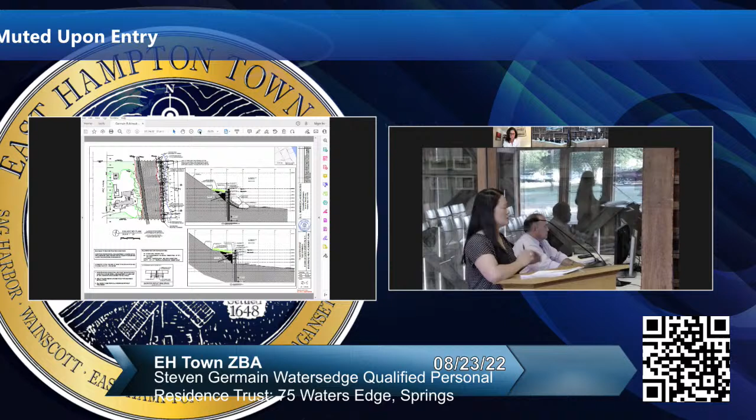No, most of them are okay. Once the shore guard is put in behind, depending upon where it sets, some of the stones have shifted a little bit, so they'll just be lifted and reset right in place, so that you can replace the bulkhead.

Yes. Now, on the tie rods, are they helicals or are they tie rods to dead men? They were converted to helical piles. They were originally proposed to do dead men, but we discussed it with the engineer, and the helical piles, they feel, are sufficient to stabilize it while minimizing the disturbance area.

So we will have a little tiny bit of disturbance just on the back side, and that area will be replanted with beach grass. But we felt that the helical piles will give the same kind of stability for anchoring it while not having to over-excavate and place new dead men.

And the equipment for the helical piles will be brought how? Through the barge? Correct. It'll all be done from the water. There is no land access.

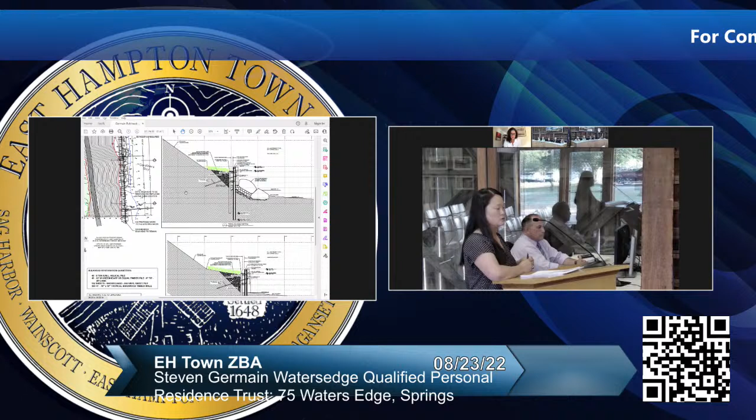There's no bluff walkway down to this property. It's about two properties away through an HOA property that you can gain access to the site. Otherwise, everything will be brought in by barge, and all the work will be done via the barge as well.

So the boulders that are there now will be moved out of the way for the repair of the bulkheads, then put back in place where they sit now? Most of the boulders can actually stay where they are.

They'll pull the existing damaged bulkhead out, and then they'll just drive in the new bulkheads. And then if any of the rocks have shifted in that process, they'll reset those. There are a couple rocks that have shifted as well, so they'll reset those in the same process. They'll do about 30 feet at a time.

And there's still no proposed work to the existing groins. Correct. They're going to remain as they are.

And then the revegetation of the bluff afterwards, you want to speak to that? It'll be minimal because we are no longer over-excavating in order to place the dead man. But there will be beach grass placed on the landward edge, which is already growing there right now. And it is a substantial bluff there with vegetation. Oh, absolutely, very, very well screened.

Anybody have any questions? If these change to helicals, it's going to change slightly what you're doing in order to achieve your goals. Will there be a drawing that's going to reflect that we'll have less planting, potentially? You're just going to complete the planting or whatever's necessary when this project is done behind the bulkhead, is that right? Correct. And there was a drawing submitted that shows the helical pilings.

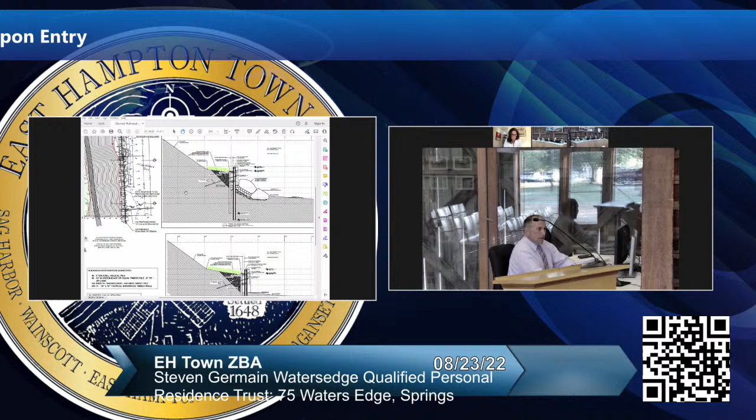The only thing that's a little bit different here is that at the northernmost of about 1,400 linear feet of properties, they either have stone armor with a bulkhead or just stone armor and no bulkhead. The only exception is that 60-foot gap in the southern portion of the property, which is going to stay that way to be consistent with the DEC permit.

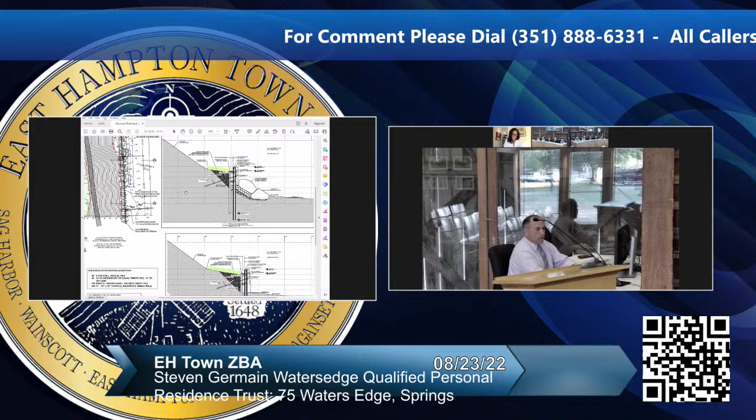These are the most recent plans. These are the plans up on your screen that show the helical piles replacing the tie rods and dead men. And all of the detail that the planning department recommends for construction access are shown on the Maresca plans here.

The bulkhead is composed of non-treated materials, as is the practice of the board. Access is from by barge.

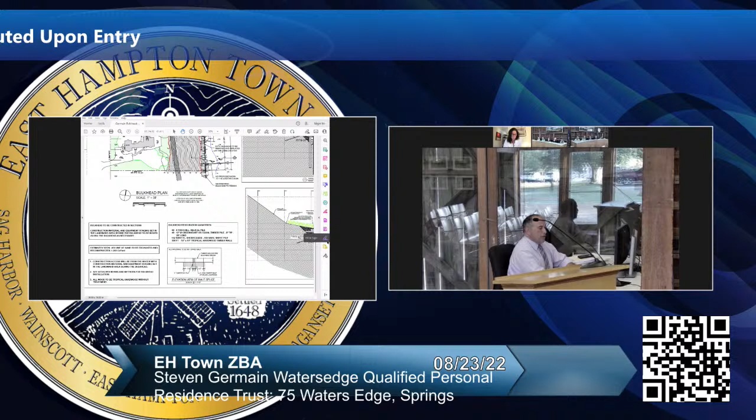Disturbed areas would be revegetated, and as the planning department has done in similar applications, any alterations to the shore perpendicular groins should be prohibited. But in all really substantial ways, the application is pretty consistent with a number of recent applications that the zoning board has reviewed at the north end of Water's Edge, the north end of Accabonac Cliffs. But if there are any questions that I can answer about the application, I'd be happy to.

Any questions for Brian? No, I'm good, thank you. And Matt, is any callers on the line? No, there's no callers on the line. Okay, thank you. Denise, you want to close out? Yes, let me just find my paperwork.

In the matter of the application of Steven Germain, Water's Edge Qualified Personal Residence Trust, 75 Water's Edge in Springs, Suffolk County, tax map number 300-83-7-10. I make a motion that we close the public hearing record, in the record, the hearing and the record. Second. I'll concur. I concur as well. Thank you.

All right, next hearing we have HRH Design Group LLC at 172 Cranberry Hole Road, Amagansett, Suffolk tax map number 152-1-13. The applicant is HRH Design Group LLC. The size and location is 318,512 square feet at 172 Cranberry Hole Road, Beach Hampton, Section 5, map number 1763 in Amagansett.

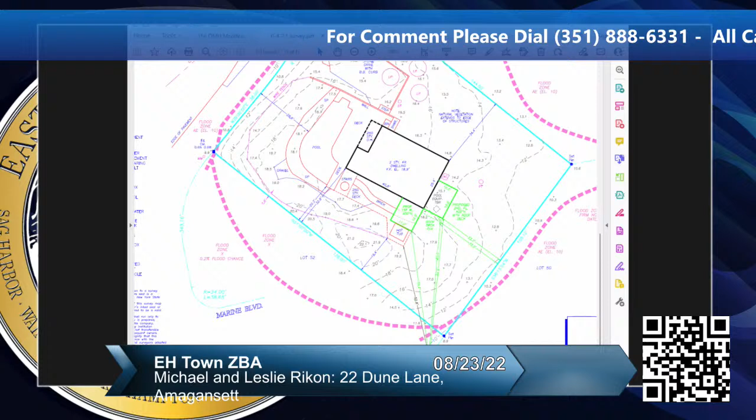All in all, it seemed - well, all in all, I'm going to deny this application. I think it's not the minimum variances necessary for the additions, and I think there are alternative designs that could be done. As far as the NRSP, I think this does not meet the NRSP standards as far as protection of the dune lands. We did get this revegetation plan and invasive plant removal plan, and while it sounds good, I didn't find it detailed enough, and it also gave me additional concerns about the natural resources protection of the dune land on this property, as well as on the other portions of the property where the additions were proposed. So all in all, I think it does not meet the natural resources standard for protection of the dunes, as well as the wetlands that are on the property. So I am looking to deny this application.

Can I ask a point of clarification? On the denial for the addition not meeting alternative design or location, what are you basing that on? Are you basing that on the planner's comments? Right, but we have a qualified architect saying that was improper planning. So I just want to make sure that that's a proper nexus for not approving that. I just want a clarification of that.

I understand what you're saying, but one of the variance standards is that reasonable alternatives can be considered to achieve the same goals. I'm not questioning your denial, I'm just questioning the reasoning for that particular thing, because when I looked at the elevation diagrams, it looked odd to me on the east side with just the two posts with the second floor addition. I don't know if that's apropos.

I know he said that, but I'm not sure I heard exactly why he thought that. Well, I think he spent a bit of time on it, and when you have an architect around as long as he has, from a qualification standpoint, I think we got to give that some credence.

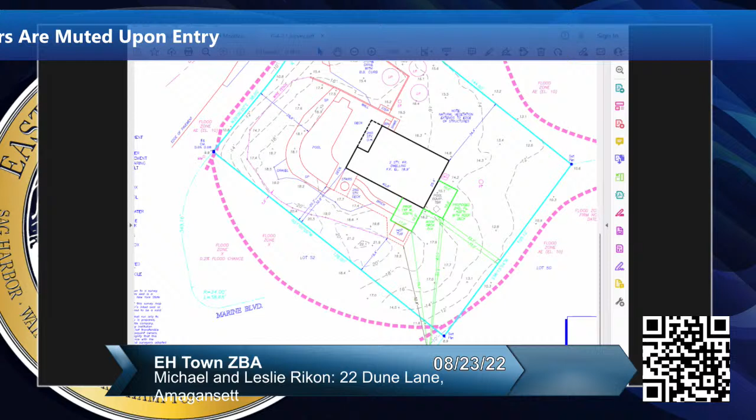So for that reason, in what I consider to be a close call, citing the code, we talked about whether or not alternative reasonable uses of the property or alternative designs existed. Alternative designs certainly existed under 255-5-51, but in line with a comment made by the chair, they may not have been practical enough for the client to agree to. Nonetheless, I am looking to join my fellow board members and deny this application. Thank you.

Right off the bat, I'm also in agreement on a denial on this. So I want to put that at rest. I just want to clarify the reason why we did it.

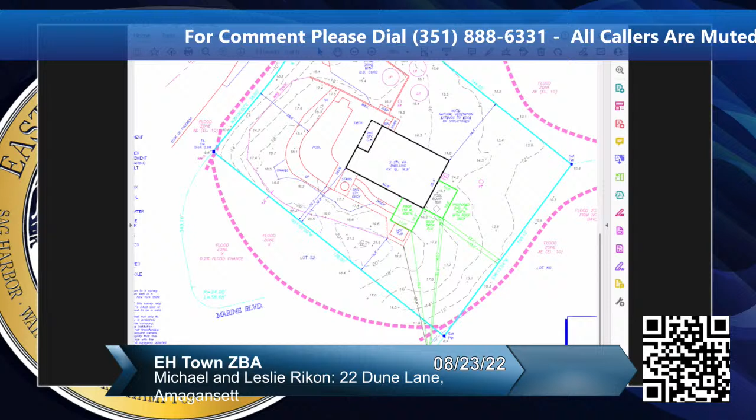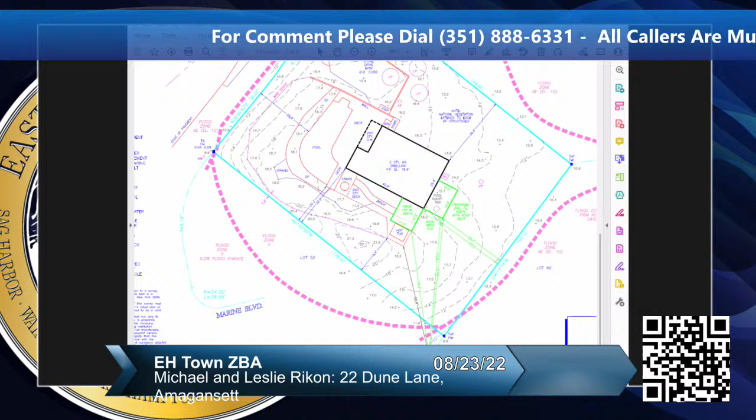For me, this is a non-conforming lot. It's an undersized lot in an area that is dune lands, wetlands are there, and the neighborhood was primarily beach cottages. I think from an expansion's point of view, this house is already large for this property, and further expansion is offsetting that. I agree with member Johan that I don't think the re-veg rises to the level of offsetting that redevelopment. I would have also liked to have seen the septic system addressed, but when you have non-conforming lots like this, originally intended for small beach cottages, you have to start looking at where the limit of redevelopment is before it changes its character. So that's my reasoning for that.

You didn't want to hold off? That's fine. Council, are we good on that? Yes, you are. Thank you. All—

Right, next we have Dante Brittis at 330 Gerard Drive in Springs, Suffolk tax map number 300-64-1-18. The size and location is 24,636 square feet at 330 Gerard Drive in Springs.

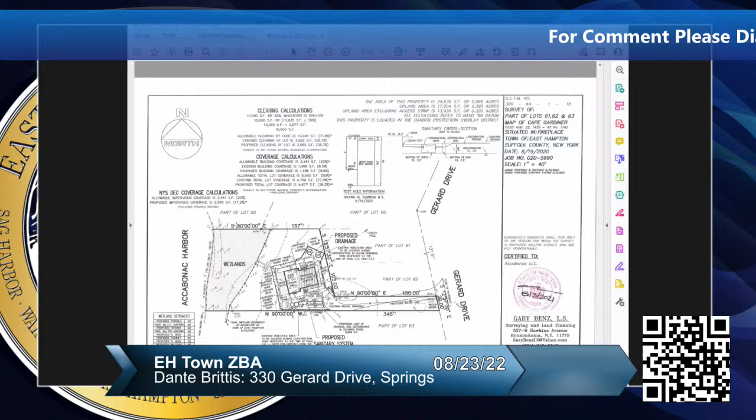The description is to renovate an existing one-story residence and construct 502 square feet of one- and two-story addition with 223.9 square feet of first and second floor decking, a pergola, and an outdoor shower on a parcel of land containing tidal wetlands and beach vegetation. The relief sought is a natural resources special permit pursuant to 255-420, and variances from 255-440, minimum wetland setbacks of the town code, and any other relief necessary.

The following wetland setback variances are required. One and two, variances of 41 feet are required to construct the closest of the additions and the outdoor shower, 59 feet from wetlands. Three, a 66-foot variance is required to construct the pergola 34 feet from wetlands. And four, a 40-foot variance is required to construct the closest of the decking, 60 feet from wetlands, all where a 100-foot setback is required for structures. The zoning district is A2 residence, AE flood zone elevation 8, X flood zone, and the SEQRA class is type 2.

Terry, you did the report, I believe. Yeah, on this one. Can you want to start? This is Denise too, so maybe Terry's— I can start, you're going to start, yeah, and then start, okay, then we'll go around. Okay, so this hearing was— what's this hearing? May 17th? Do I have that right? May 17th, yes, 17th, okay.

And we had the survey we were using, Gary Benz survey dated June 3rd, 2021. The agent for this applicant was Richard Hammer and Joe Halsey. Mr. Hammer was the one that spoke at the hearing.

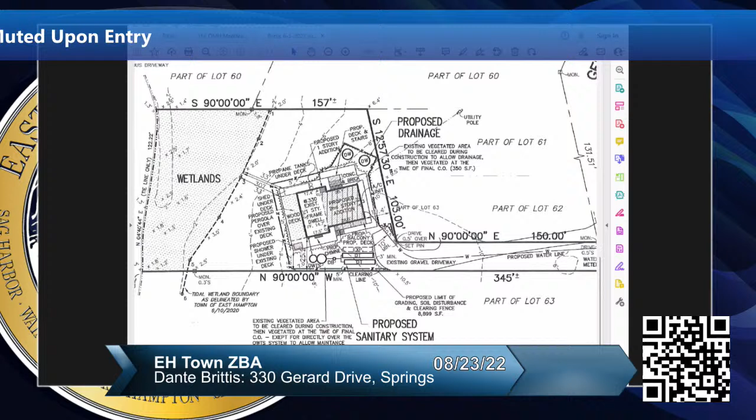But I think I'm going to spend a few moments in the code looking at, I know Denise already alluded to it, 255-1-11, which deals with the purposes of the town code and why the town laid it out. There's some critical ones here, and I'll take a brief moment to read the ones I think apply. It's 255-1-11A, the orderly growth: to guide and regulate the orderly growth, development, and redevelopment of the town in accordance with a comprehensive plan and long-range objectives, principles, and goals set forth therein as beneficial to the interests of the people.

And B, it's the protection of neighborhoods: to protect the established character of the neighborhoods, especially residential neighborhoods, the social and economic well-being of residents, and the value of private and public property. And C, the proper use of land: to promote in the public interest the utilization of land for the purposes of which it is most appropriate, and to protect and promote public access to the usage of public-owned lands and waters. In E, the preservation: to promote in the public interest the preservation of prime agricultural land, productive wetlands, protective barrier dunes and beaches, unique vegetation, important animal habitats, and other natural resources, and man-made features of historical, environmental, and cultural significance to the community.

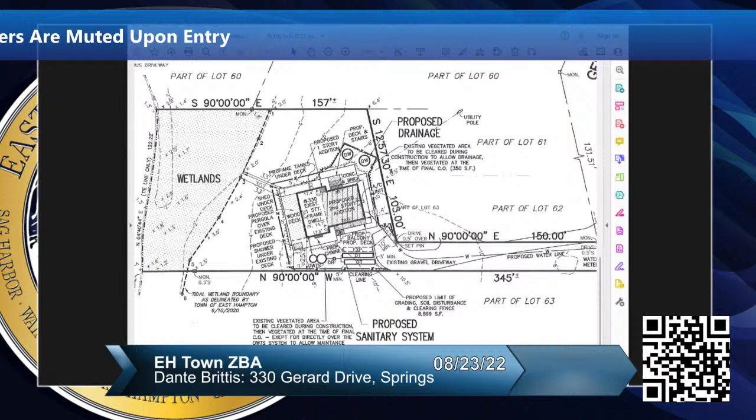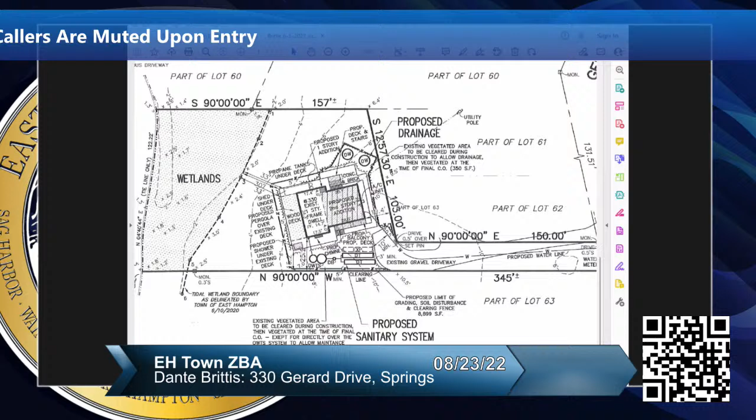And I think G applies: clean water, to protect and promote the fisheries and resort industries of the town by perpetuating and, where necessary, restoring a healthful biological and chemical balance throughout the town's waters, including its bays, harbors, wetlands, estuaries, ponds, streams, kettle holes, and other bogs, natural drainage channels, and water courses, as well as the adjacent sounds and ocean—which basically describes this area, right? I believe Accabonac Harbor was one of the impetuses for the town developing this code.

And then finally in L, and I think this is important as well, the aesthetic attributes: to perpetuate and enhance areas of natural beauty, to retain outstanding water views and other open vistas available to residents and visitors, and to perpetuate generally those aesthetic attributes and amenities which not only please the eye, but which together are the essence of the nationally recognized character of the town. I think this is paramount to this piece of property. I think just adding a second floor on this will completely change the character of the neighborhood from everywhere you look. So with that, I'm also denying the application.

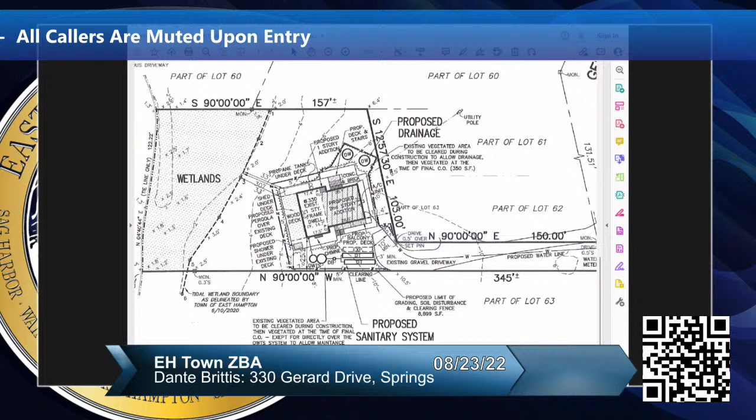Let's move on. So what do we got? We have other decisions, and I'm going to read this in, and maybe Brian, you can go through it with us.

316 OMH LLC is 316 Old Montauk Highway in Montauk, Suffolk tax map number 300-88-1-26.2. The description is to modify a February 4th, 2021 determination which allowed 473 square feet of deck to remain and construct 742 square feet of first floor addition, 559 square feet basement addition with window wells and egress sanitary system, and a 53 square foot outdoor shower on a parcel of land containing bluffs and beaches.

Brian, maybe you can just kind of run through it with us. Sure, Mr. Chairman. This is a modification request that was reviewed by my colleague Tyler Borsak. This is a property that was approved for a one-story addition in 2021.

The modification had an administrative approval issued by the planning department. It didn't require any variances. And the reason this is being brought to the board's attention is the scale of the modification.

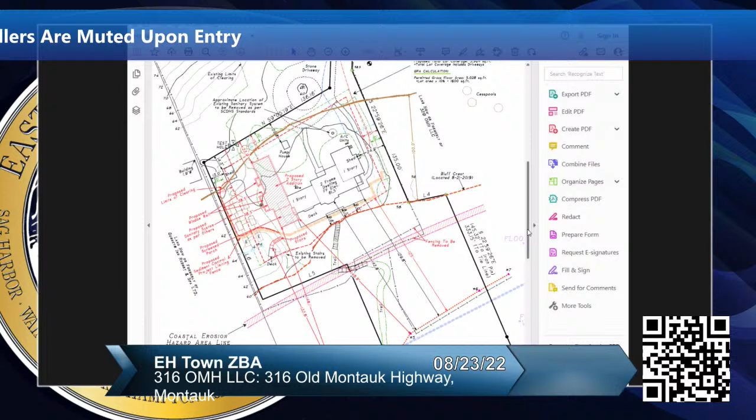I know we received a letter August 19th from Rick Whalen's office saying that it's not a significant change. I would disagree with that. And I think that anytime we're dealing with something like this on Old Montauk Highway, which is not absolutely just a minimum change, we have to consider going to a hearing.

So my look on this would be that this is something that has to come back for a hearing, primarily, or at least equally, so that the public can weigh in. The public is important on all decisions, and the highway certainly draws a lot of attention. So that would be my take.

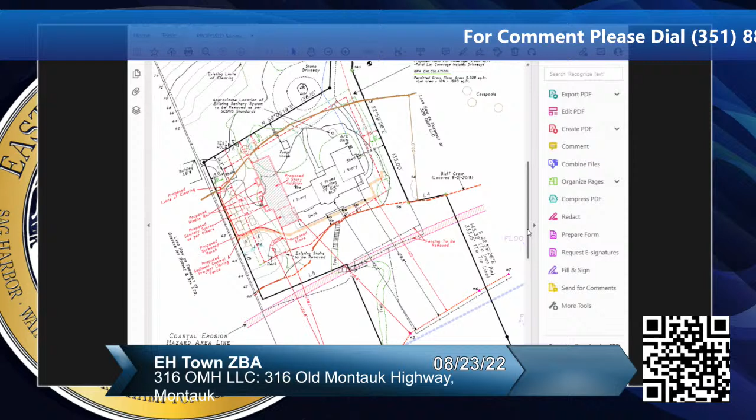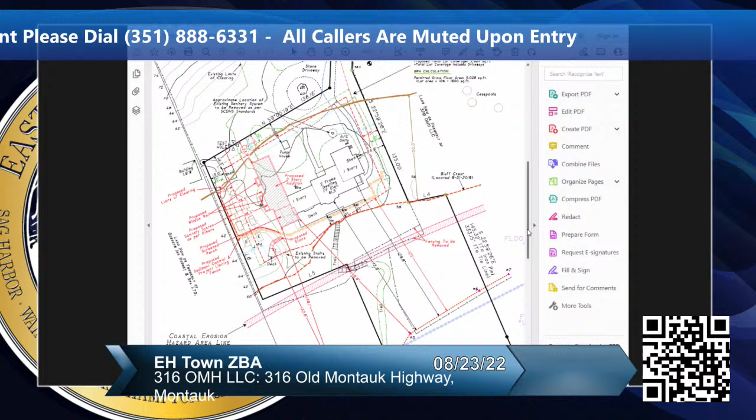Denise, go ahead. I agree with Vice Chairman Johan. This is a substantial change. And the neighbors who were affected by the earlier proposal didn't object to the administrative NRSP, and now, of course, there's a brand new application that they have not been made aware of. So I do agree there is a process that we have to respect, and I do agree that this should be scheduled for a public hearing because they are really very substantial changes.

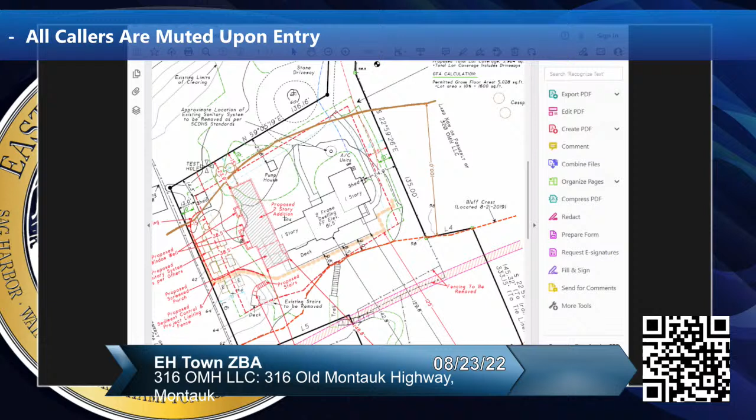They're significant, and the public really should be a part of the process. I agree. Terry? Okay, I agree. I think the changes that they're proposing are substantial, and regardless that it was an administrative application previously, I disagree with the points pointed out in Rick Whalen's memo. So I too think it needs to go to a hearing.

Yeah, I agree. I think there are modifications and then there are brand new applications. And while sometimes there's room for discretion, this one clearly seems to be on the side of it. They should have applied fresh. I think if I was a neighbor, I would be taken aback by seeing a one-story house suddenly go to 2 stories without my being noticed.

I agree. And I'll also throw in there, because applications go through a scrutiny, even with the zoning board, I think it's important for us as a board to take a look at the application, not only the public. That was Ed's point about really looking at Old Montauk Highway exactly. Counsel, you good on that? Yes, thank you. Just testing if you're still there.

Procedurally, this was an administrative permit, so I don't know if it's appropriate to have a hearing for the board to modify an administrative permit, or if procedurally it's more correct to direct the applicant to make a new application.